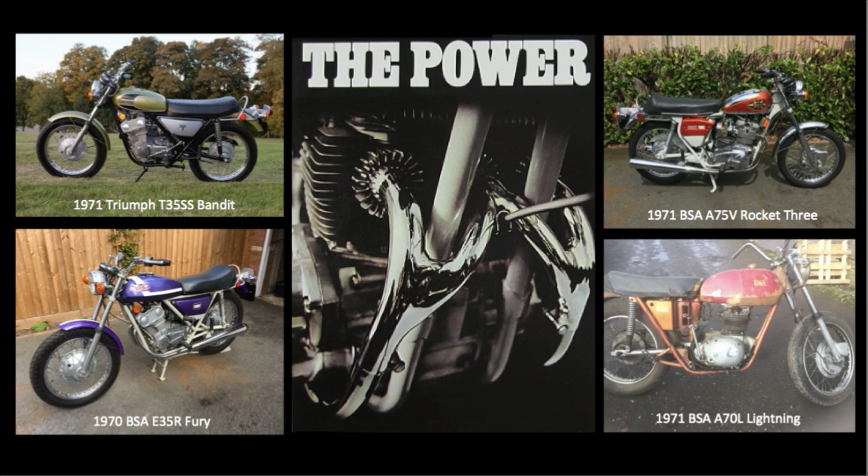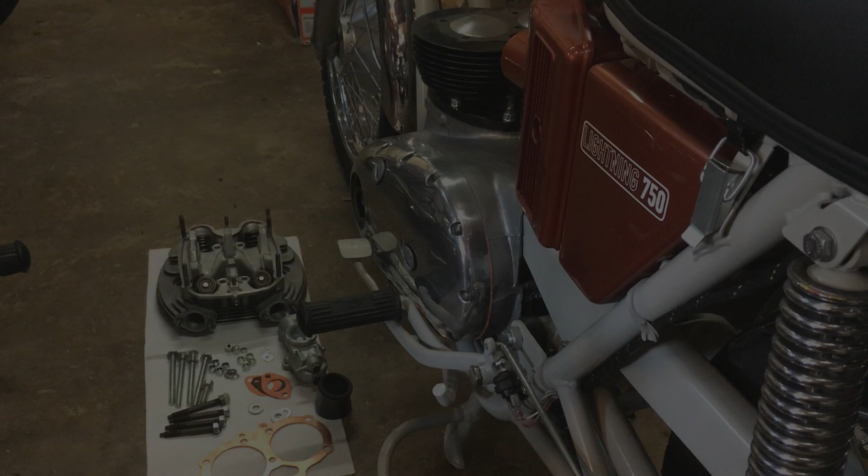Right, parts have arrived, so it's cylinder head time on the Lightning.

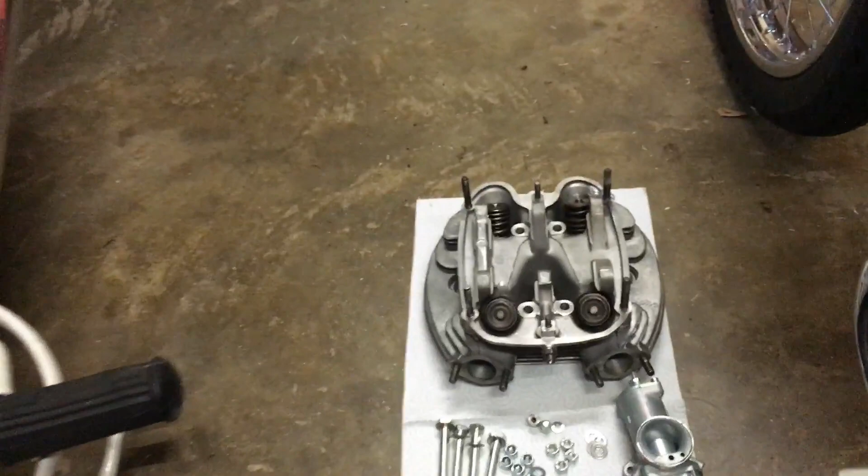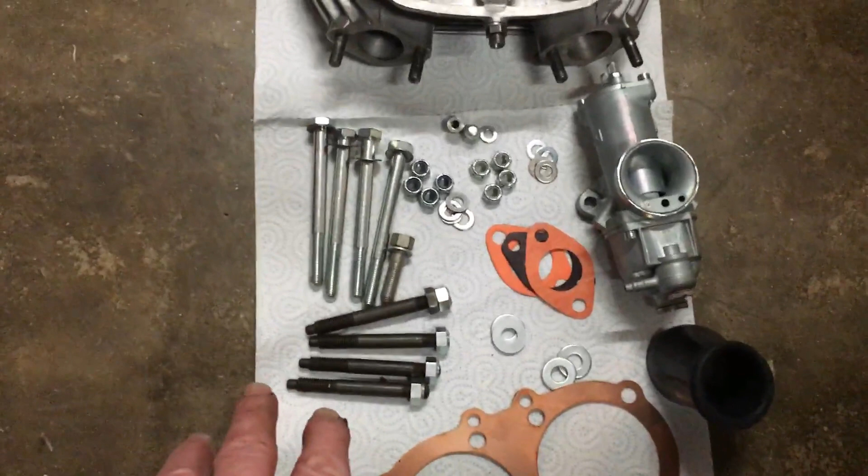So there's the head all prepared that we've seen in the previous two videos, now with all its studs inserted for carb and rocker box. Then we've got cylinder head bolts and the centre head bolt, cylinder head studs and nuts, washers. These nuts are, one set is for the rocker box, which is those four nuts plus the dome nuts. The dome nuts go on the two centre studs. Where are we? That one and that one, with their washers, and the other nuts are for carb mounting with their washers too.

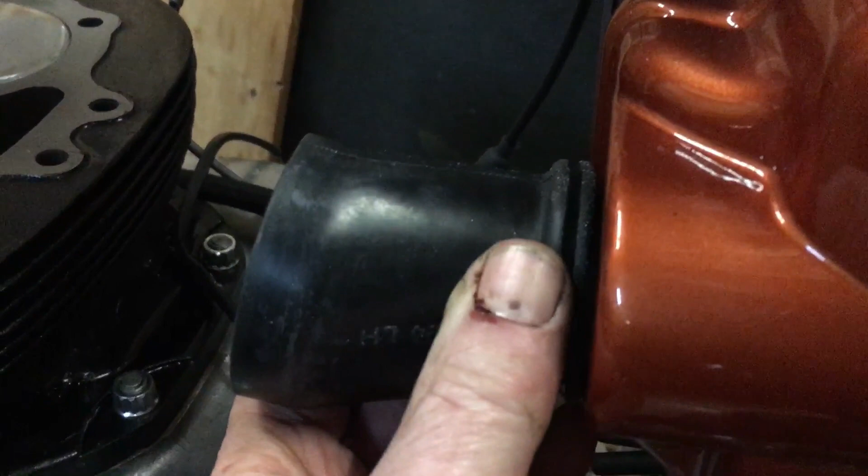You'll notice I've got the carb here, and that's because once we've got the head on, then it'll be nice just to put the carb on this side and just to check that out. That's the carb rubber to connect the carb at the top here with the air filter side panel housing. And with respect to these rubbers, actually the carb end, there's no clip, Jubilee type clip at that end. It's purely a push on fit, but not onto the carburetor itself, it's onto a ring that you screw on to the carburetor at that end. And all I've done to create that ring is just adapt the small flutes that you get with new carbs, cut it down, and the rubber fits over that very well.

So it'll be nice just to see what it looks like when we put that on. And then of course head gasket.

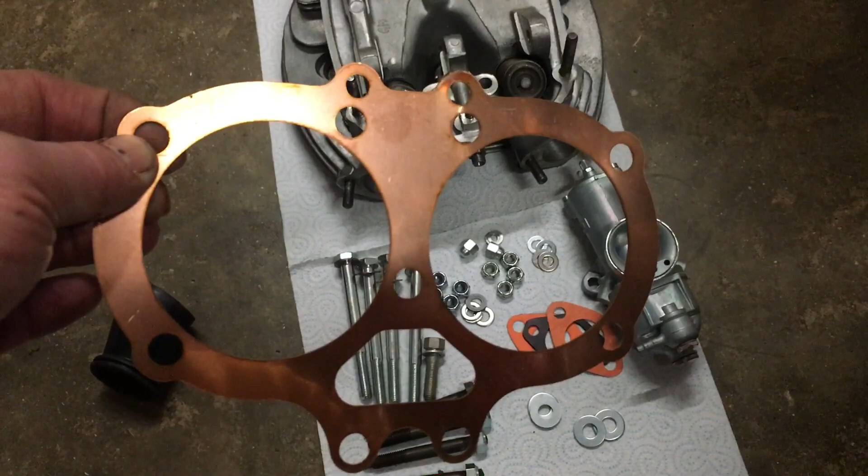Now there's always a lot of talk on forums etc with respect to head gaskets, whether you need to anneal them. When I was in my youth, as a 19-year-old, I had a Lightning 650 then, a 1968 model, and I rebuilt that, and I was a member of the Manchester BSA Owners Club at the time, as I was at Salford Uni, and they always recommended to anneal and also put a light smearing of grease on either side of that gasket.

So that's what we'll do first. Normally just heat it up. You can use the oven, but blowtorch is good enough until it oxidises all the way around, and then dump it into a bath of cold water that I've got ready in a bowl. So that's the first job we'll do, is we'll anneal this copper gasket.

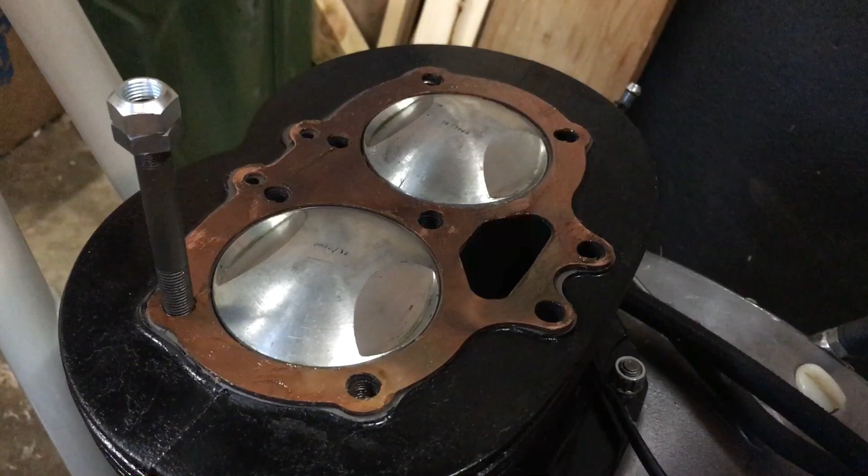Okay, gasket annealed and lightly greased, and you can see it's attained that slightly oxidised look, even though it's been quenched. Next thing is to put the four outer studs on, and the way I'll do this is, as you can see, I've got an old nut there as well as the new ones, and it's just double nutted, so we can then turn them all in. So I'll get those in, and then we'll be in a position to slot the head on.

All studs in, really nice tight fit. I had to clean the threads slightly on a couple of them and lubricate, but they've all gone in very well, right up to the end of the thread. So now we can actually, I think, sit the head on at last.

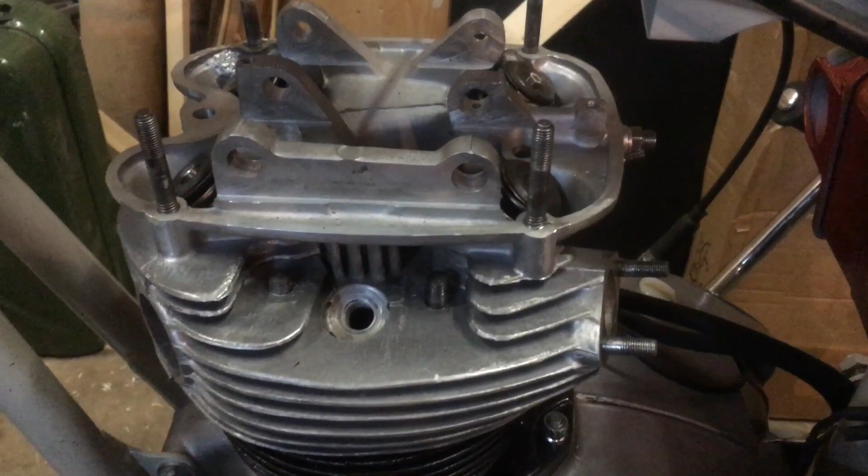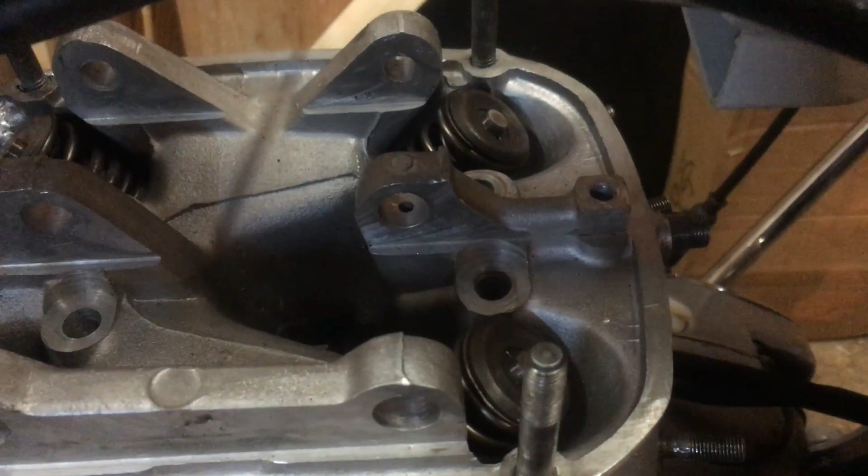Right, the head's on over the studs, but it's got to come off again. There's so little room to work with under the spine of the frame that firstly you've got to take the central studs out so they don't foul the frame. But now, having got the head on, you can get the two front central head bolts in, but you can't get the rear ones in because the frame is in the way. So you've got to take the head off, I think, and put the bolts through those holes so they're in there when you place the head over the studs. So that's what I'm going to do now.

Right, progress. All the nuts and the bolts, head bolts are in and finger tight.

However, slight problem, the two front ones here, although the same length as the back ones, they're tight and they're still probably about, I don't know, 1/8 of an inch off seating on the washer. So I think they're too long. Easy enough to shorten them, but that's just a pain. But luckily the front ones we can get out without taking the head off. If it were the rear ones, we'd have to take the whole head off again.

So that's just annoying, but anyway, we can do that. Other observation is that all these studs are the same length. The ones for the front though are a little on the short side, so we don't get a full nut. I haven't torqued it down yet, obviously, so we'll get a bit more on that, but I don't think that's right either, really. I'm going to live with it, but let's have a quick look in the parts book. To me, they should have slightly longer studs in the front, because the studs are going through effectively another pair of fins.

God, the bench looks like a damn mess at the moment because of all the trials and tribulations of this head.

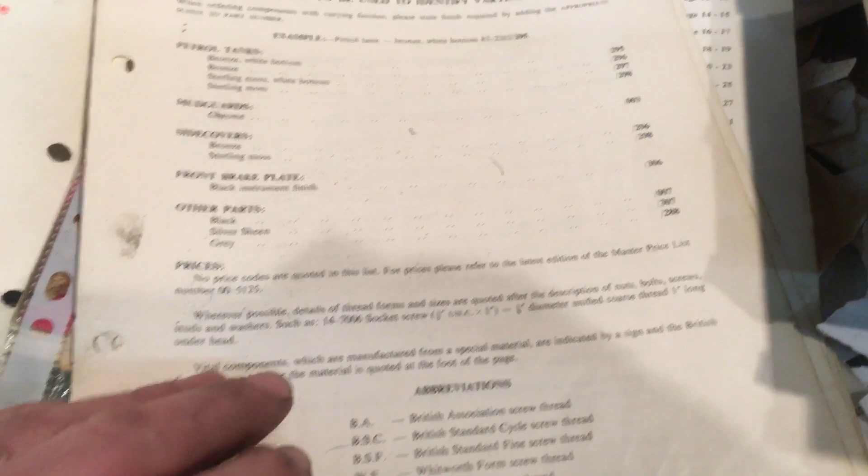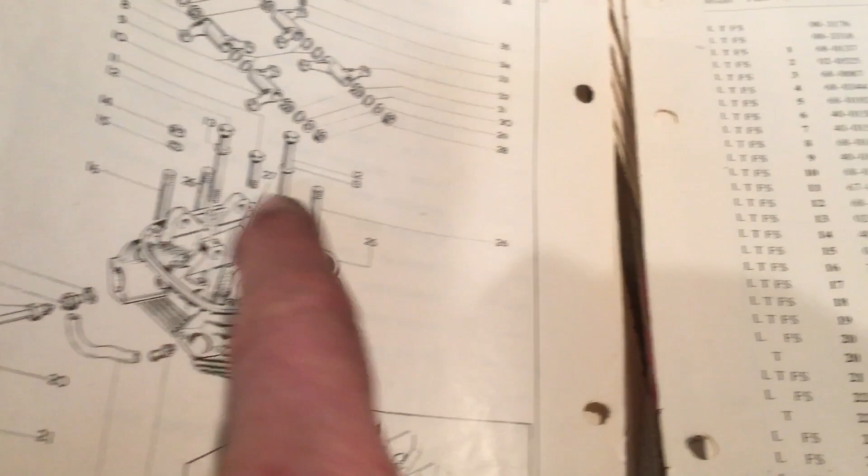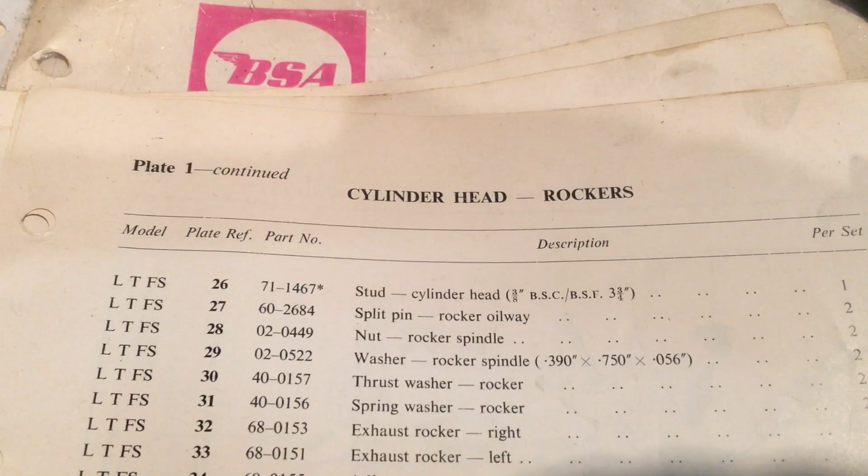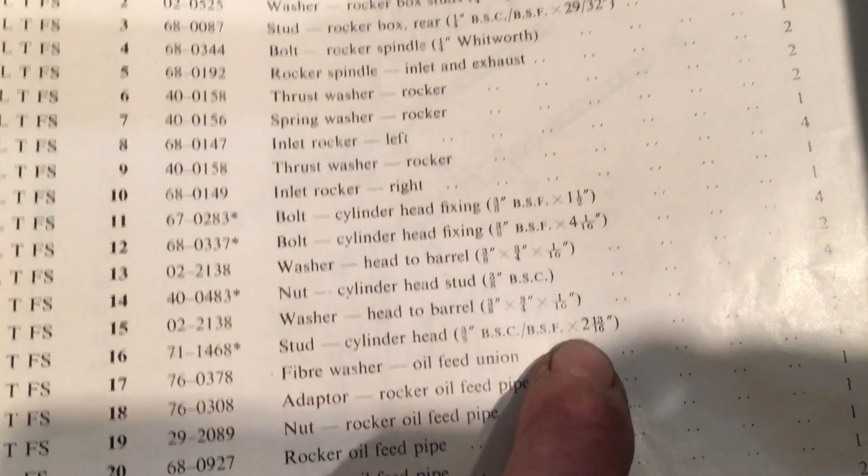Anyway, let's have a quick look. So here we go. 16. Yes. 16 and 20. 26. Right. So the front studs are 3 3/4, and the rear studs, 2 13/16. So there's the problem.

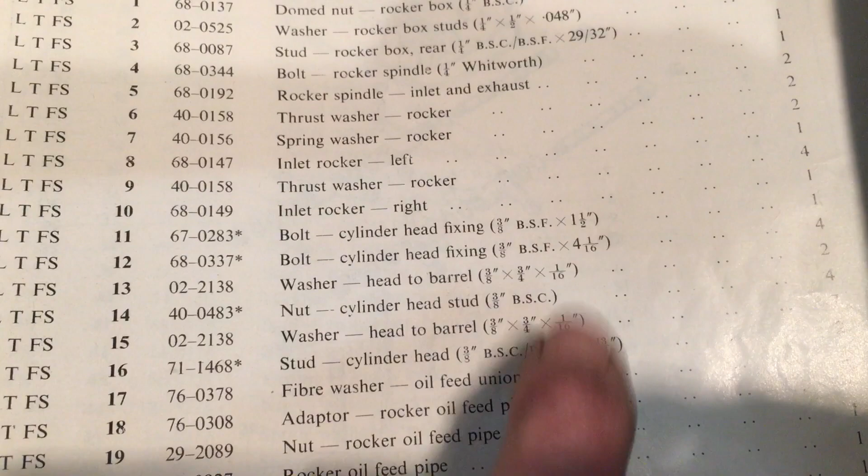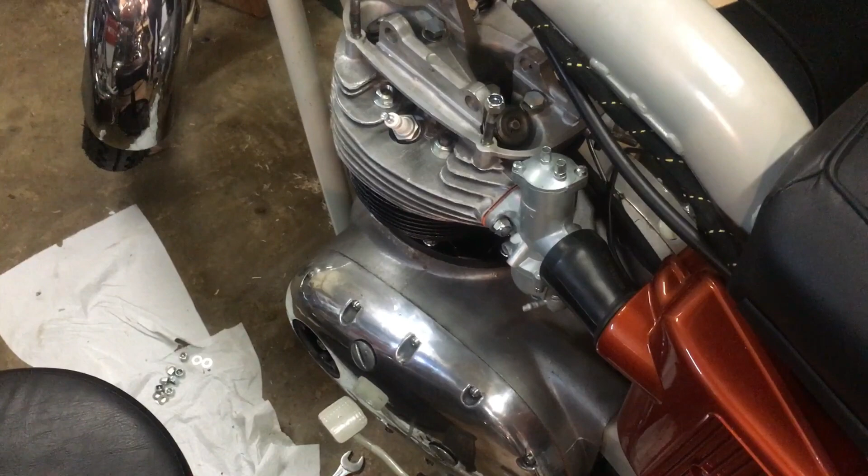Think. It looks pretty neat. We'll have to see if we can torque them up. I'll ponder on that. Anyway, first thing is to get those two central front head bolts out and shorten them. I mean, that's the other thing I'd check as well, whether or not they should be a shorter bolt.

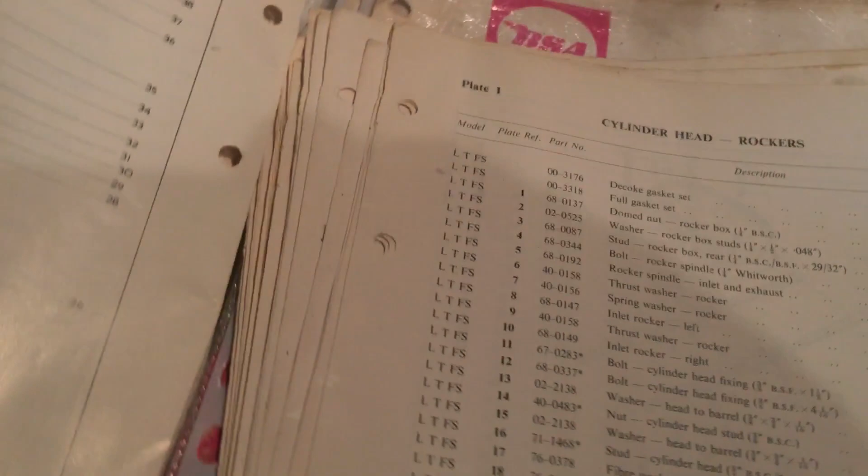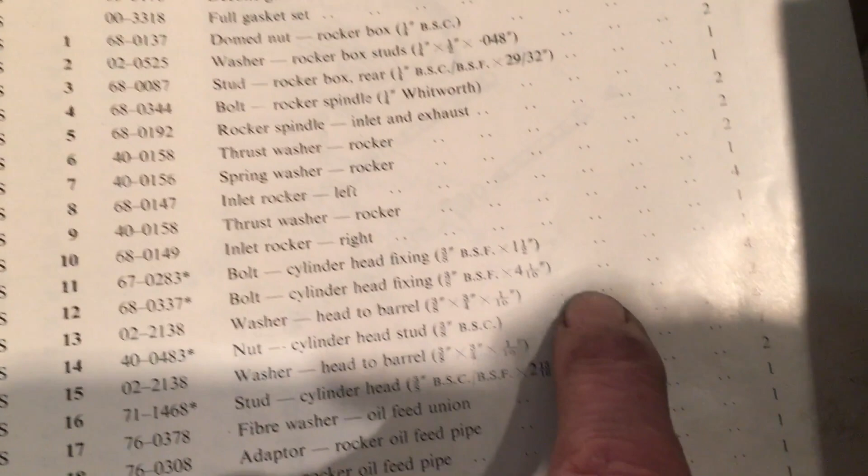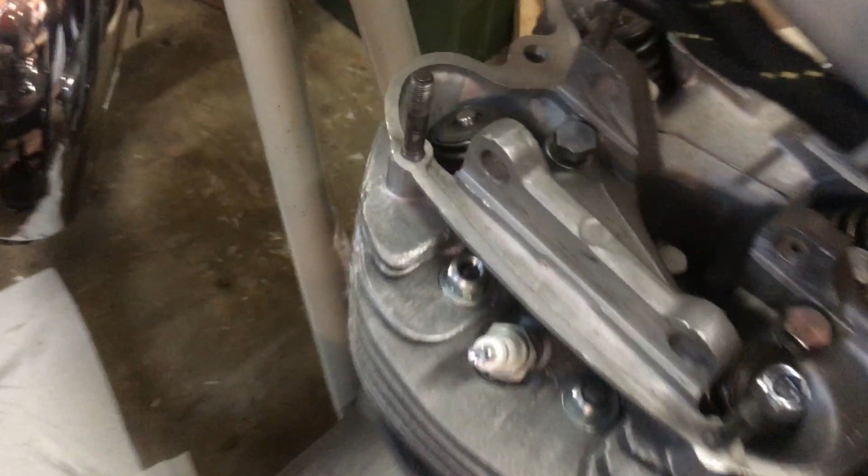So that's 11 and 12. No, they're all the same size. 4 1/16, 4. So the front and rear are the same size, and they are. But it's a bit strange that both of these front bolts stop at about the same place, and I'm not going to torque them any more. So we'll take them out and have a look.

Right, sorted. So I've not shortened these bolts, I've just used an extra thicker washer, and that's done the trick. Similarly, I've used thinner washers on these at the front, and certainly on the other side, not far off, on this side I've just about got a full nut. So I'm happy with that, and obviously the proof of the pudding will be in the torquing down. So everything, including that centre bolt there, is all sort of firmed up, but now we'll torque them down.

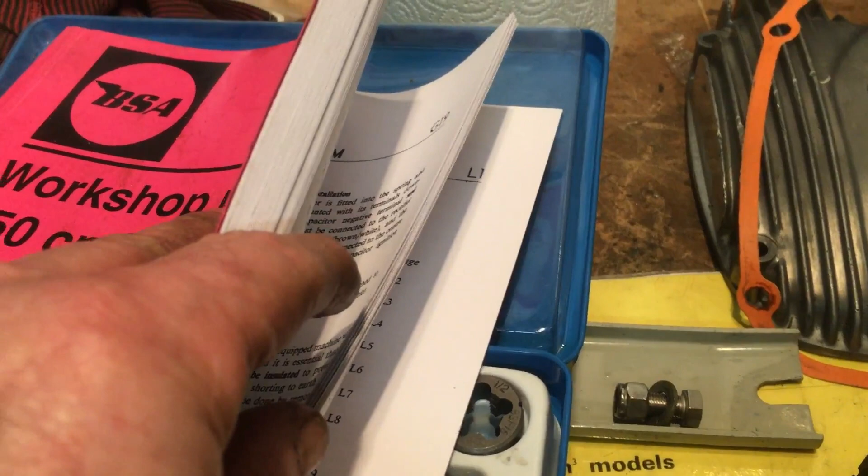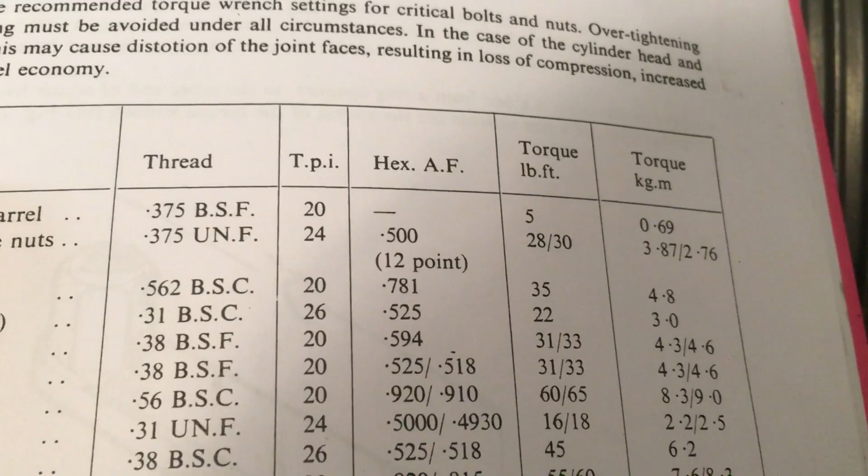So we'll need to just check the torque settings in the book. I think it's, what is it, section J. Yeah. So, studs are only 5. Oh, that's studs in the barrel, 5. Cylinder barrel crankcase nuts, we've got those. Cylinder head bolts.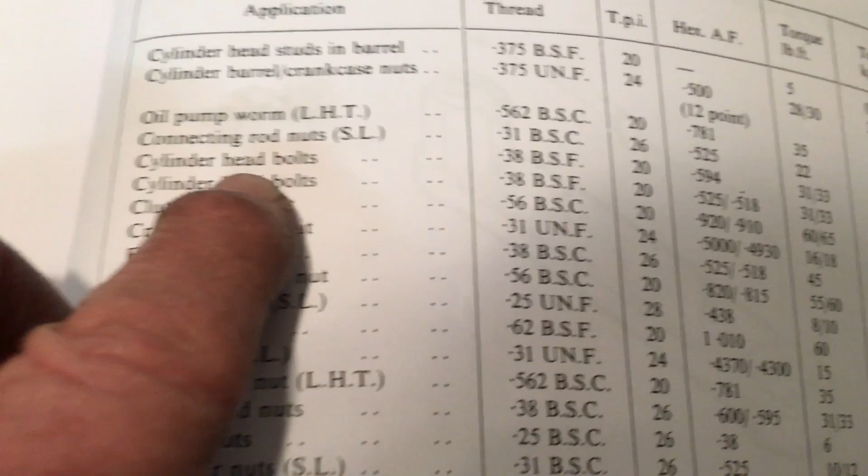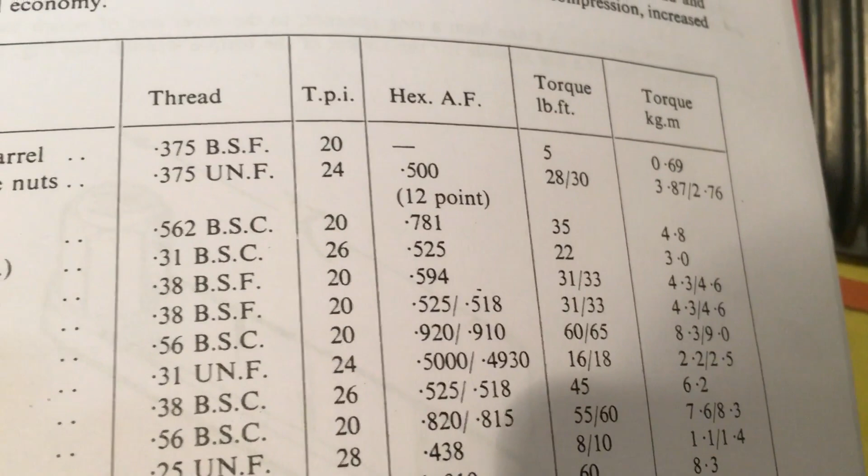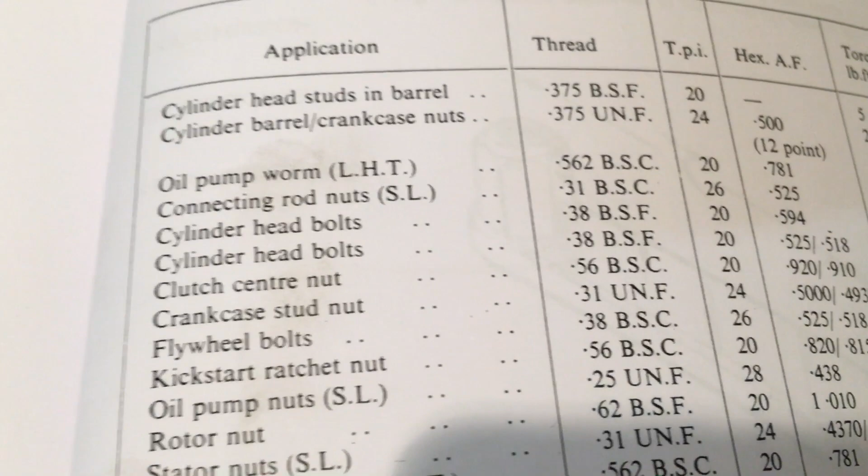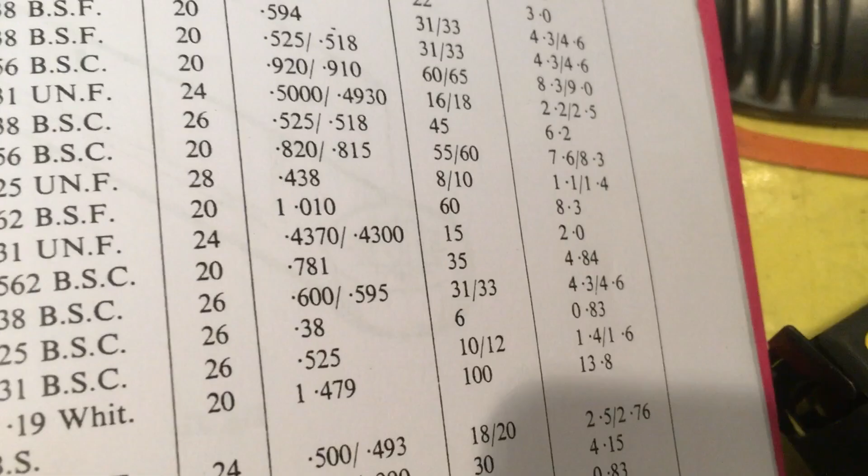31 to 33. Doesn't say anything about the cylinder head nuts. Oh yes, it does, there they are, cylinder head nuts. Oh, 31 to 33. So it's all the same, 31.

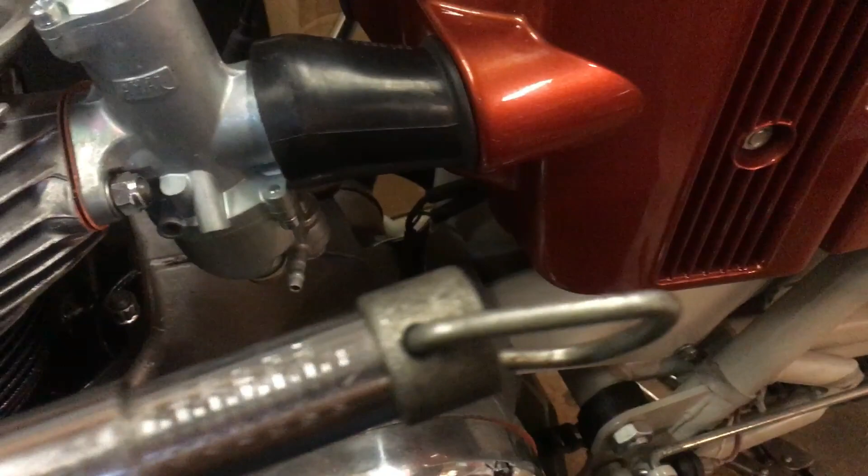Right. Torque wrench at the setting. Click stop. I'm just going to do them 20 pounds first, and then we'll take them up to 31. And I was always taught to start at the centre and then work out. So we'll go centre, then diagonals for the 4, and then out to the outside on diagonals, two. So I'll bring you back once I've got them up to 20.

Okay, done. They all torqued up beautifully. Obviously with these nuts I can't get a torque wrench on those, so it's a bit of an estimation on pressure, etc, and also on number of turns between 20 pounds to 31, which worked out about half a turn on each. But anyway, these I can assure you are very tight, and I've just about got a full nut now on there, and certainly have on the other side, so I'm pleased with that. That's all good to go.

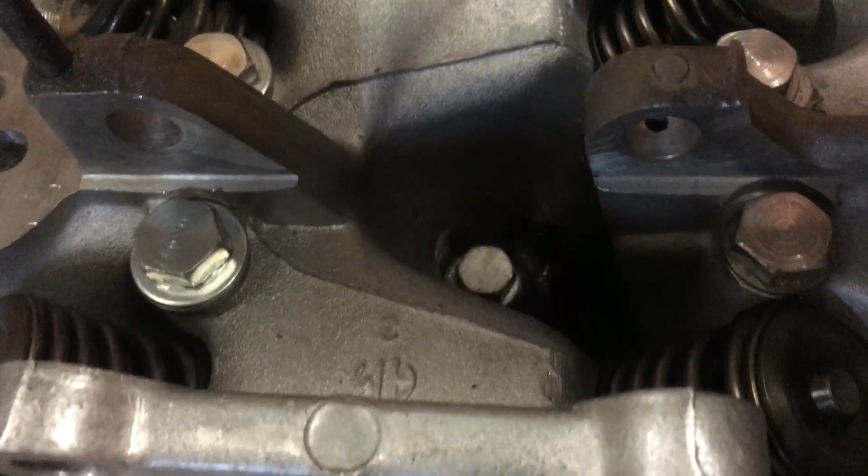I'm just going to check that centre bolt again. I did start from the centre outwards, but I'm going to go back and just check that one again. We just want to make sure that's tight, because that's the weak point for blow-by. Right, good, checked, all done. Looking good. Next stop, tappets and push rods.

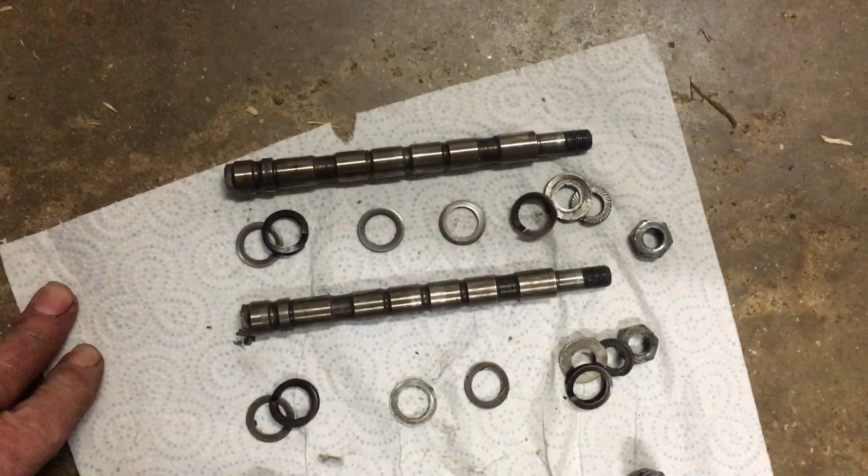So we'll get those all lined up and I'll bring you back. Right, here's the two rocker spindles with the sequence of the washers. So from the blind end you have plain washer, spring, rocker, plain, then you have the central stub, then you have plain washer, rocker, spring, washer with a smaller bore for that end, then you have a mounting nub, then you have a spring washer before the nut on this end, and that's the same on both sides. So let's get cracking and get these in, just thread them in gently. It's pretty straightforward.

Okay, exhaust all in. Just got to tighten up now, but they're moving freely, and you can push them slightly backwards and forwards against the thrust springs. I forgot to mention earlier that the exhaust rockers are different to the inlet rockers, they're not the same. So the exhaust rocker tappet arms are longer than the inlets. I don't know whether I can show you this well. There we go.

Difficult to see, but there we go. You can see that they are shorter. So the shorter ones are inlet. So right, onwards. We'll get onto the inlet next, and then after that we'll get the push rods in.

Hi everyone, right, next morning, and rockers, push rods, tappets adjusted. So that's the top end done. I've turned the motor several times by the rotor nut on this side. Everything working as normal. Valves not touching the head, and I've gone around and rechecked all the tappet clearances. 8 thou inlet, 10 thou exhaust.

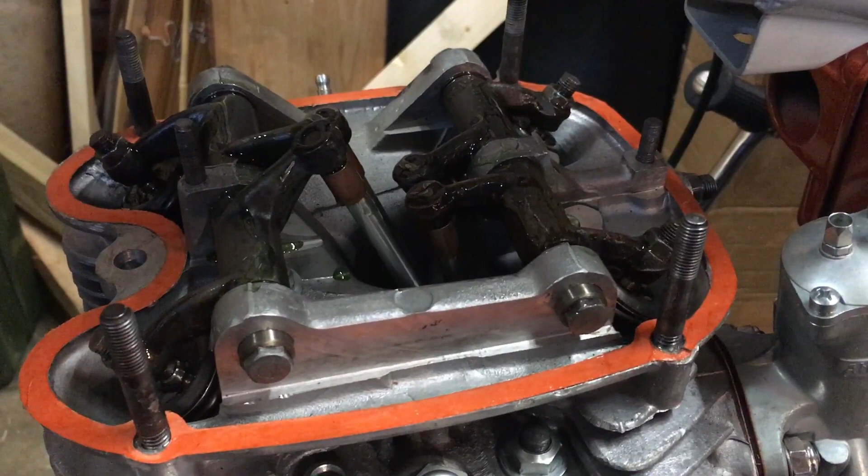So all set to now seal the top end up, and we'll get the rocker box on. So the usual thing, got the gasket, but I'll put a thin smear of silicone either side of the gasket, and then we'll put the lid on at last. Right, all set to go. Gasket on, light smear of silicone on either side, and as you can see, given the top end a liberal dose of oil, and also thrown some oil down the pushrod tunnel as well to get a bit onto the cam. Right, now we'll get the lid on. Wish me luck, this is going to be tight.

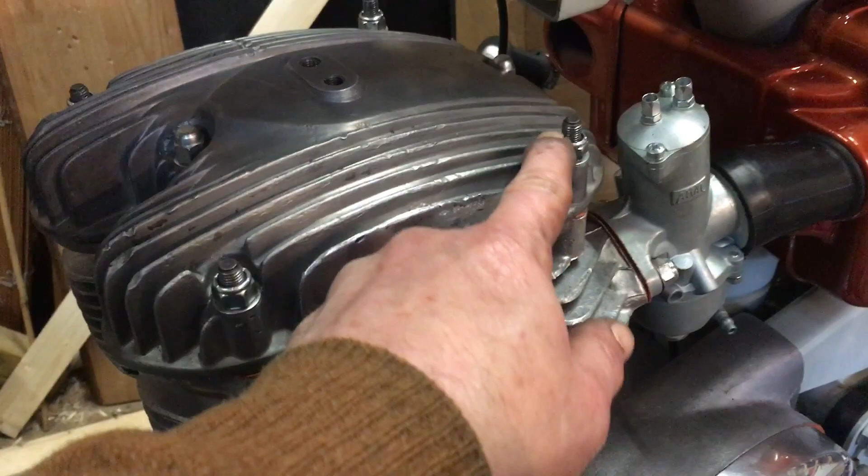Okay, lid on. It was very tight, and actually what I had to do in the end was remove these two studs on this side to get the cover on, and then I had to double nut these to reinsert them, which is why they're a little bit proud, but they're very tight. Dome nuts in the middle.

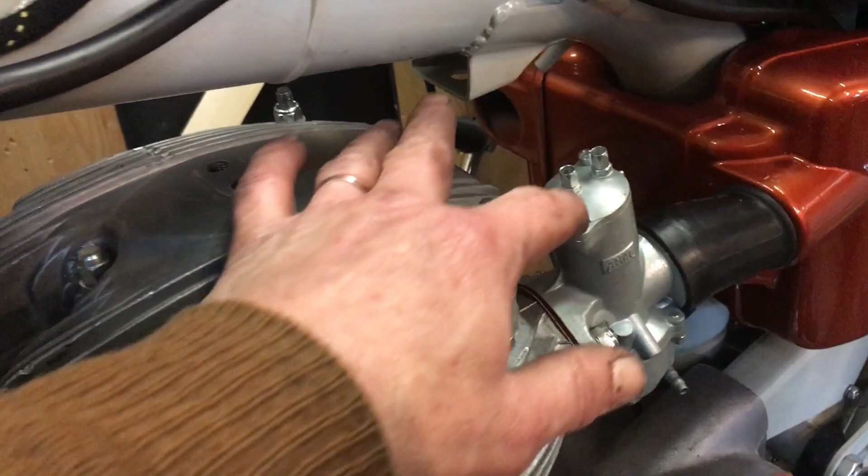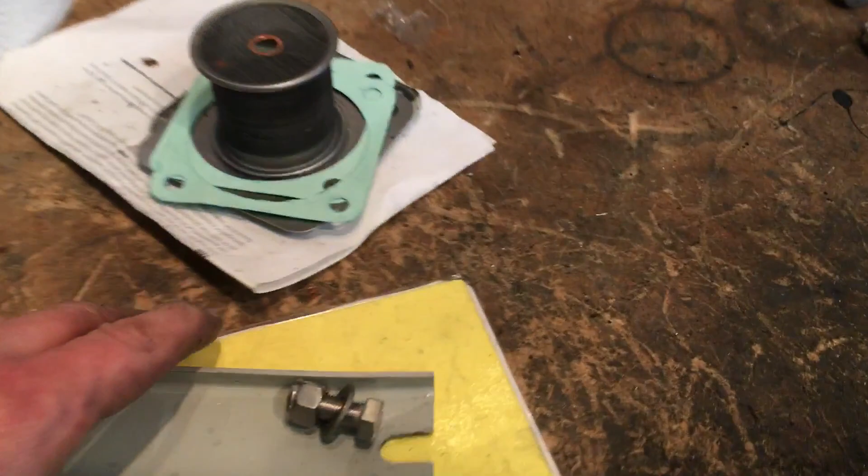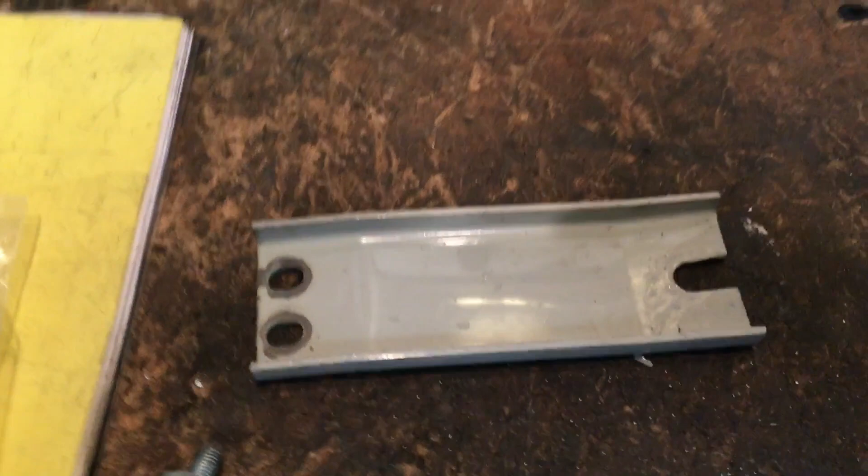All done. Right, final piece in the jigsaw is going to be the head steady. Goes from these two mounting points here to that single mounting point over there, and as I've shown you previously, let me just show you, we've managed to find a second-hand one in the original factory paint, so you can see it's a little bit worse for wear in places, but considering that's original Dove Grey paint, then I'm happy with that. I've done a bit of touching up on it and put a liberal coat of polish on it as well, but I'm going to keep it original. I just like stuff like that.

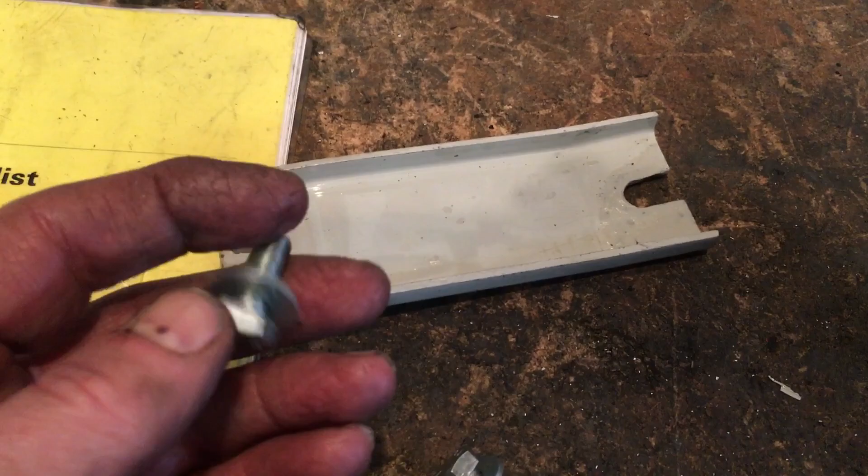So, two set screws to mount to the head, and then where is it? There it is. Nut and bolt to mount it to the frame. You can get pattern ones of these, but they're just flat plates, and they look rubbish. So we're going to put this one on. Right, I'll just get set up here and I'll get that installed on there, and I'll bring you back.

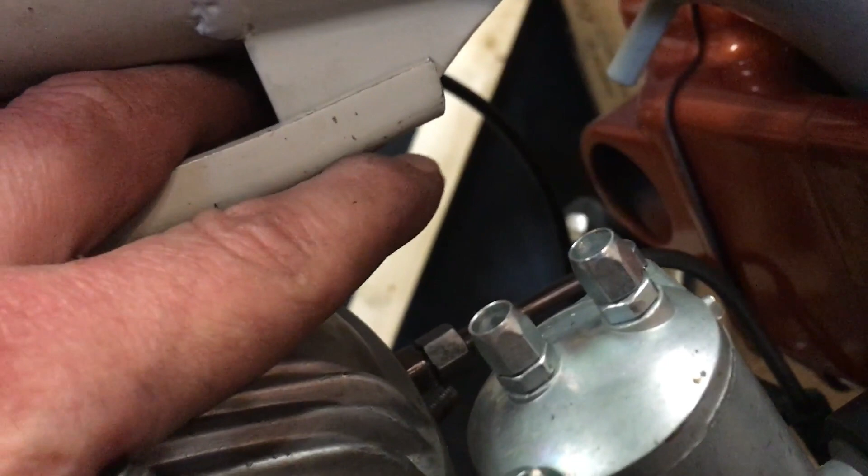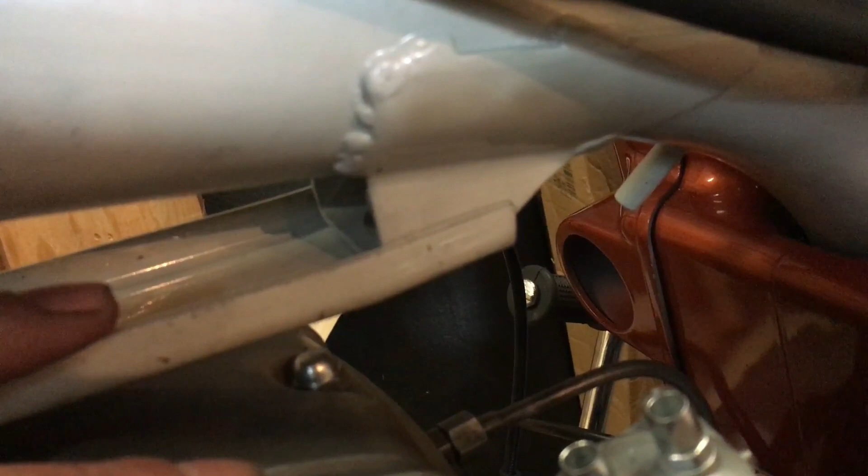Okay, job done. It was a bit of a game getting the bolt in the top of the head steady here against the frame. I've got the correct size and length of bolt, but there is no way you can thread the bolt from the top down, as it implies in the parts book. It's got to be from the bottom up. There's just not enough space there.

So this has all been a bit tight, but we've got there in the end, and as you can probably tell, although I keep saying that I had a BSA 650 Lightning in my youth, you can tell it wasn't an oil in the frame, can't you? Because it's been a bit of a challenge all the way through. But anyway, we've got there, so we can almost state that subject to timing, etc., the engine's done. So we'll end this episode there. Got there in the end. Again, never been straightforward, but we're there.

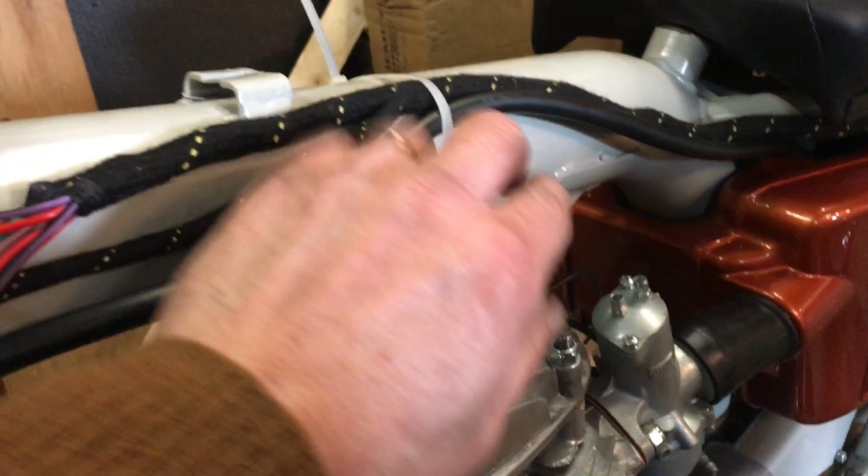Next episode we'll concentrate on installing the other carb, and then we'll get the exhausts on, and then she'll look like a complete bike, and then we'll go up to the top and finish the wiring and get this all set up more completely. These tie wraps here are just temporary, obviously. One or two cables, and we're just about there.